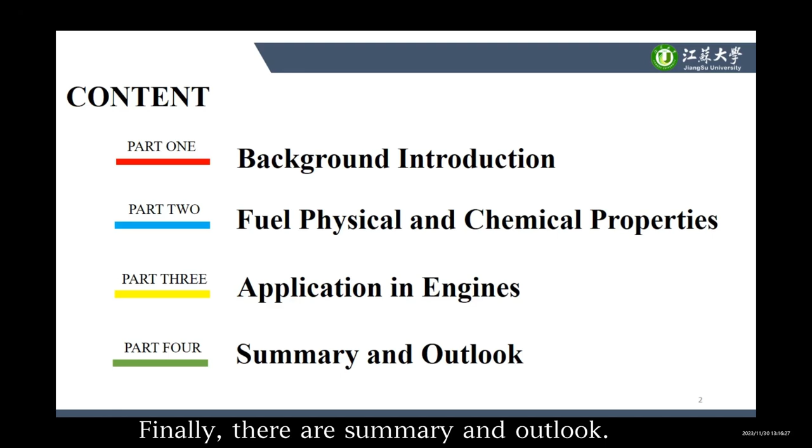First, let's go to the background introduction. Since China promised to reach carbon peaking in 2030 and carbon neutrality in 2060 at the 75th United Nations General Assembly in September 2020, and the Paris Agreement signed by major countries and regions in 2016 has controlled the rise of the global temperature and accelerated carbon neutrality policies and actions.

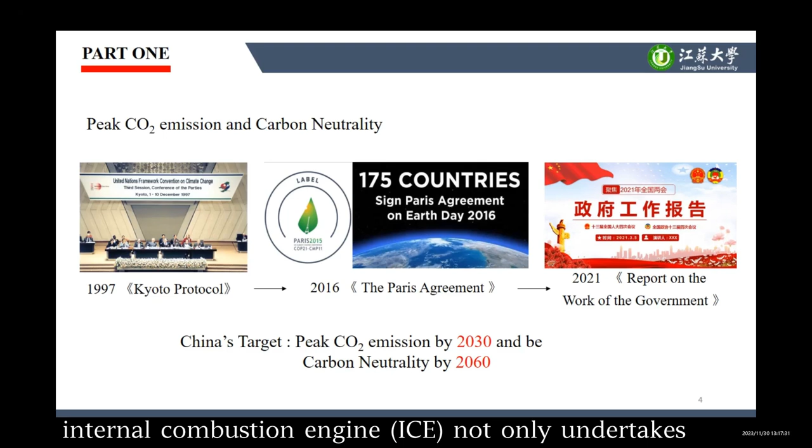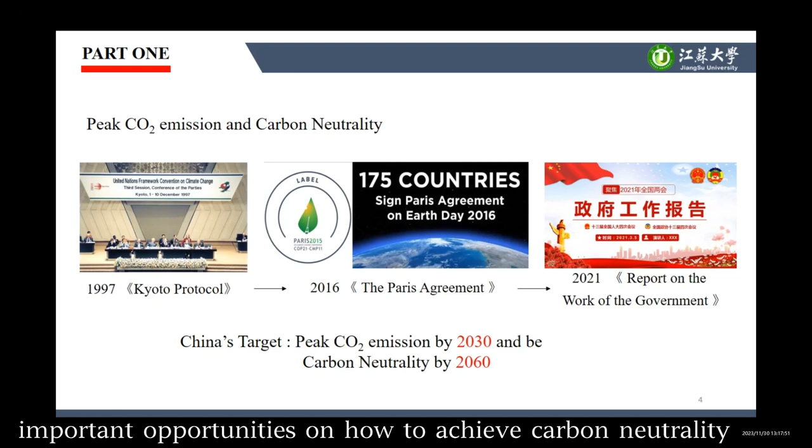As the leading power of a large number of road and non-road mobile machinery and national defense equipment, the internal combustion engine (ICE) not only undertakes the important mission of energy saving and emission reduction in the near and middle term, but also faces great changes and important opportunities on how to achieve carbon neutrality in the future.

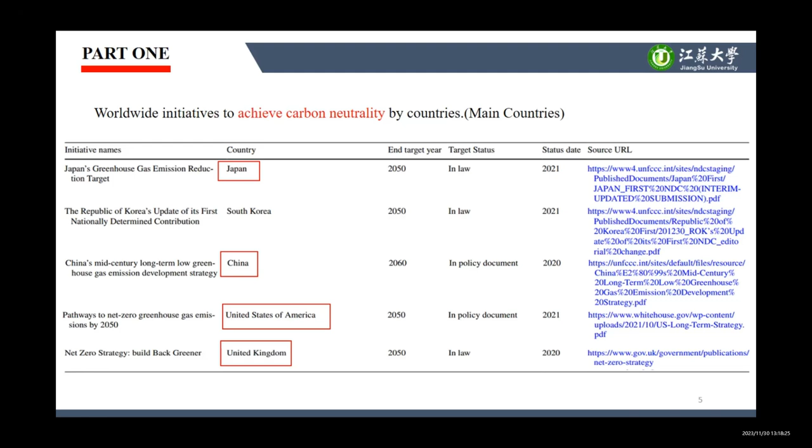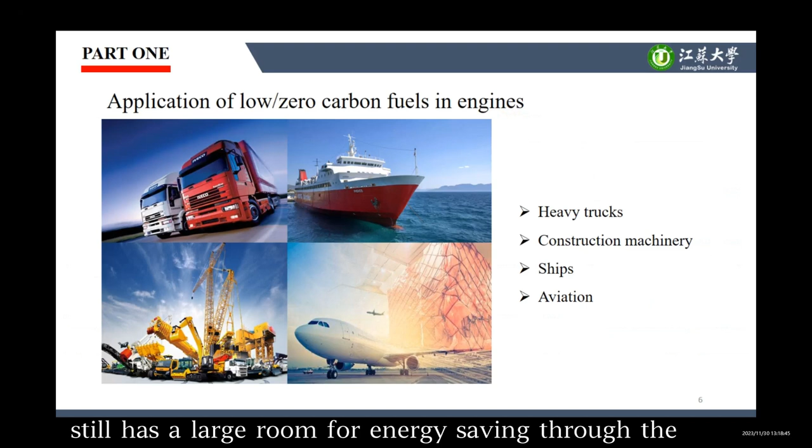This table shows worldwide initiatives to achieve carbon neutrality by many countries. At the 26th United Nations Conference of Parties on Climate Change, each country provided information on the target dates of achieving carbon neutrality and the end target year in the future. The internal combustion engine, an efficient and high power density thermal engine for converting chemical energy into mechanical energy, still has a large room for energy saving through the combination of electrified and intelligent technologies.

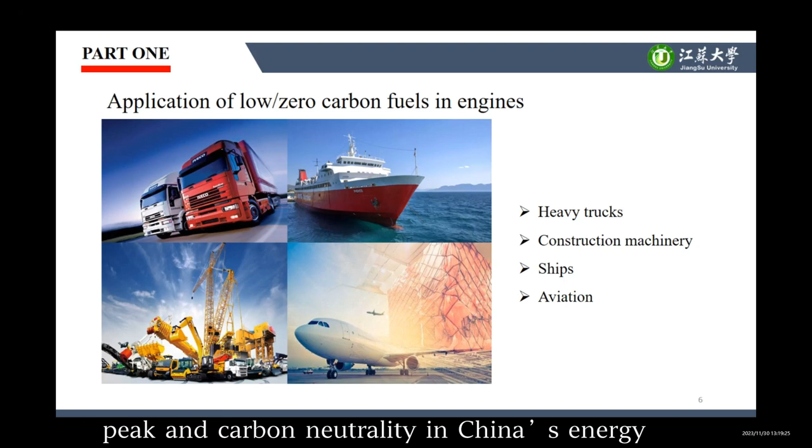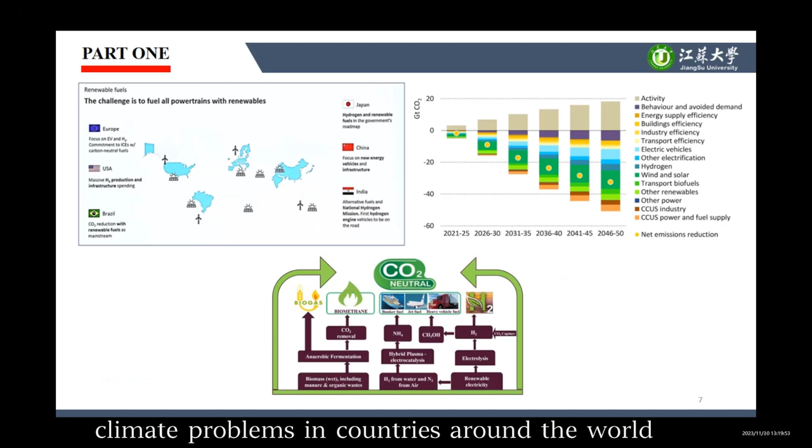By utilizing low carbon and zero carbon fuels, ICE can still be widely used in larger scale power equipment such as heavy trucks, construction machinery, ships, and aviation, so as to promote the early realization of carbon peaking and carbon neutrality in China's energy and transportation field. As shown in the upper left figure, the use of carbon-neutral fuels and other renewable fuels has become a long-term strategy for solving climate problems in countries around the world, including Europe, Japan, and the United States. The use of clean alternative fuels such as ammonia and hydrogen has become a research hotspot.

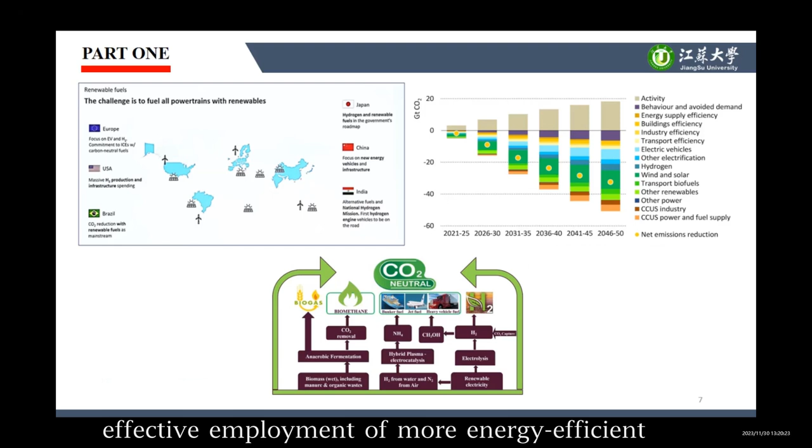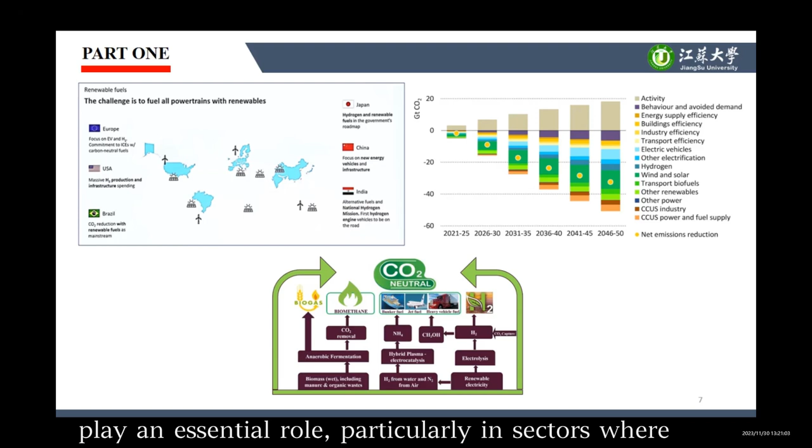As shown in the upper right figure, effective employment of more energy-efficient advanced technology, electricity generation, and rapid growth of renewables all play important roles in emission reduction. Emerging technologies and fuels, particularly bioenergy, hydrogen-based fuels, and CCUS, which means carbon dioxide capture, utilization, and storage, will play an essential role, particularly in the sectors where emissions are difficult to reduce.

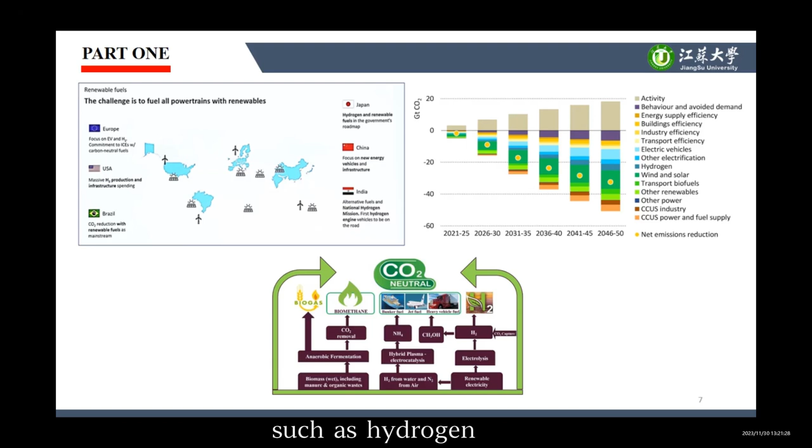This course aims to achieve energy conservation and emission reduction, and explore the application of various low-carbon, zero-carbon renewable fuels, such as hydrogen, ammonia, methanol, and natural gas in engines.

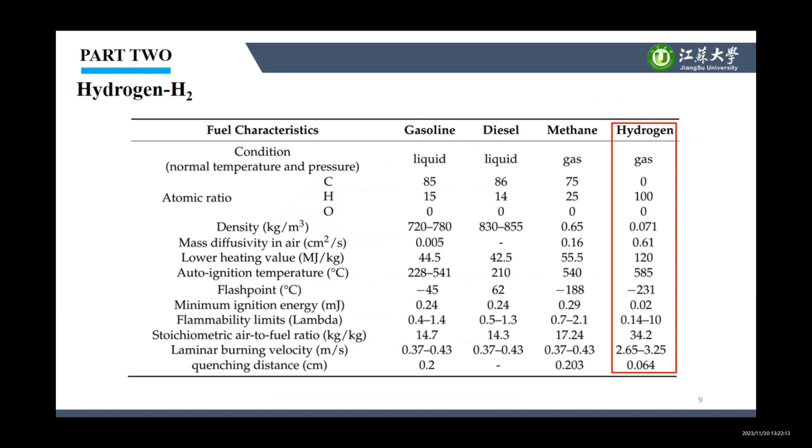Part 2 is fuel physical and chemical properties. Hydrogen can be produced from several varieties of renewable energy sources and efficiently obtained through large-scale electrolysis. And after its reaction with oxygen, water is produced. Additionally, hydrogen combustion or electrochemical reaction can be used to generate thermal or electrical energy as a power source for vehicles.

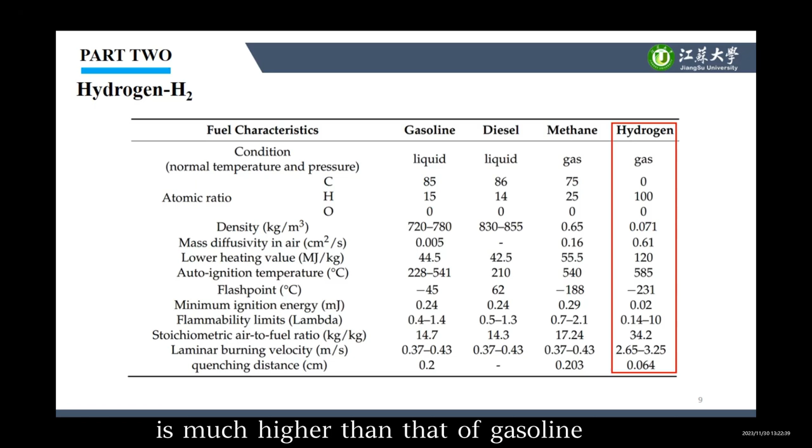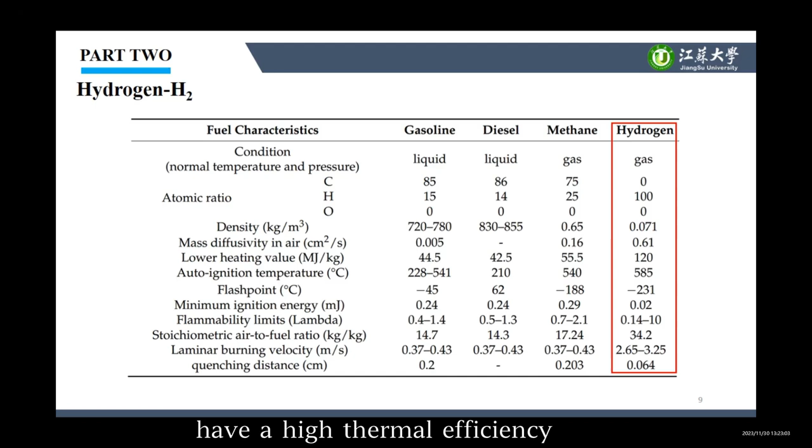The lower heating value of hydrogen is much higher than that of gasoline and natural gas. Combining fast laminar flame speeds, lean burn characteristics, and the high spontaneous combustion temperature makes the hydrogen internal combustion engine have a high thermal efficiency and potential knock resistance. This ensures the hydrogen engine has a higher indicated thermal efficiency than gasoline engines.

This table compares ammonia physical-chemical properties with some of the common additives used for assisting its combustion, that is, alternative fuels of non-fossil origin. It is reported that significantly higher ignition energy was needed to ignite ammonia when compared with fossil fuels, due to the low ammonia flammability. The minimum ignition energy was reduced when ammonia was dissociated into hydrogen to promote the ammonia and air reaction.

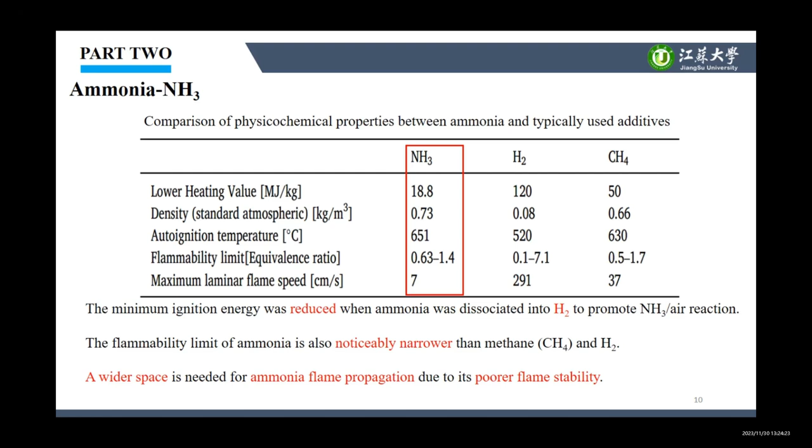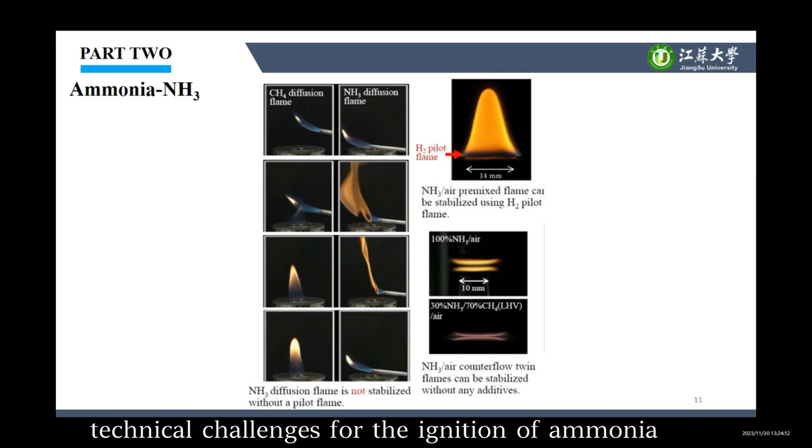The combustion rate of ammonia is very slow, and ammonia is difficult to ignite. In addition, the gasification of liquid ammonia requires the absorption of the surrounding heat. These are technical challenges for the ignition of ammonia and the stability of the flame. You can see from this picture.

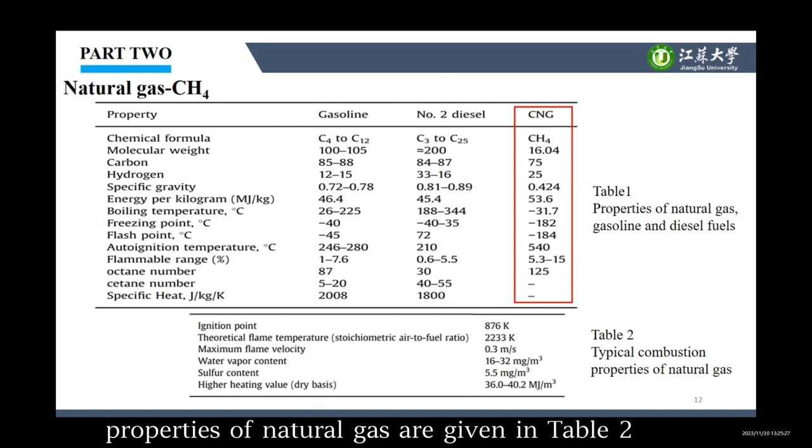Table 1 lists the properties of natural gas, gasoline, and diesel fuels. Typical combustion properties of natural gas are given in Table 2. Natural gas is an alternative fuel that utilizes CNG or LNG as an environmentally friendly fuel instead of fossil fuels.

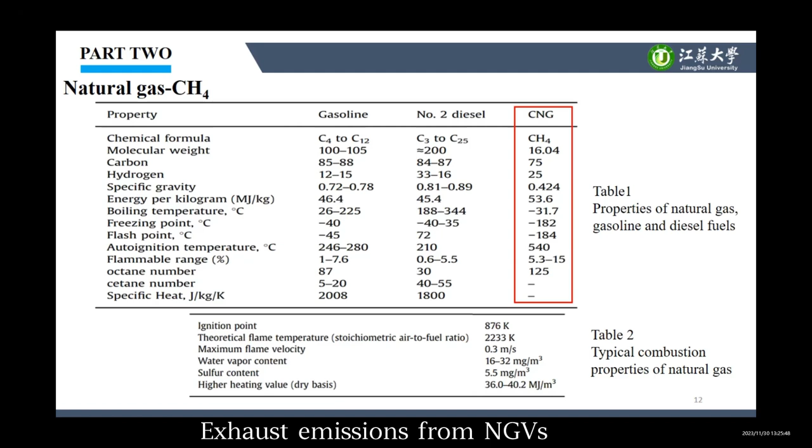Exhaust emissions from NG vehicles are much lower compared with equivalent gasoline-powered vehicles. In addition, less carbon dioxide is produced by combustion of natural gas than by combustion of both diesel fuel and gasoline, which makes natural gas engines favorable in terms of the greenhouse effect.

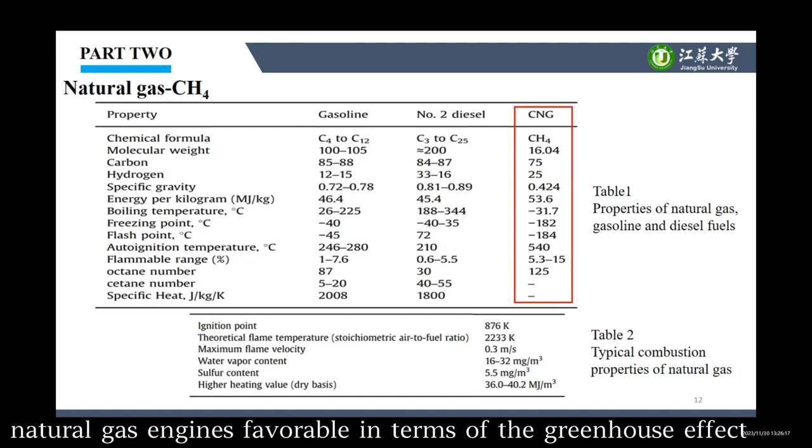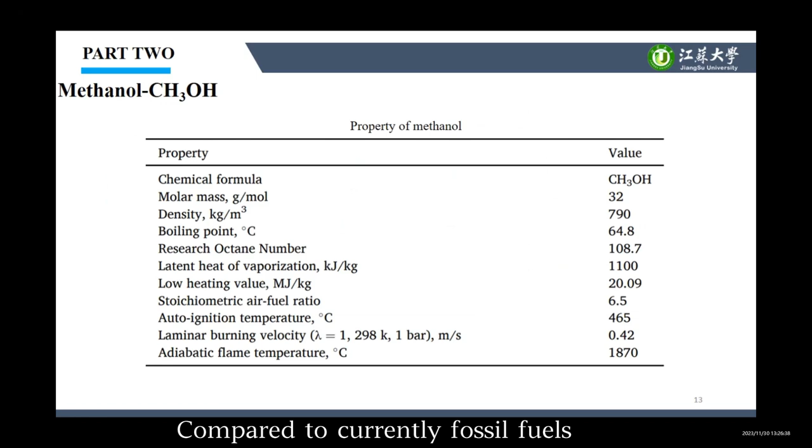Methanol is a potential clean fuel with advantages of low pollution emissions. Compared to current fossil fuels, methanol has special properties such as the high octane number, heat of vaporization, and laminar flame speed. These characteristics make it even more attractive for using in spark ignition engines.

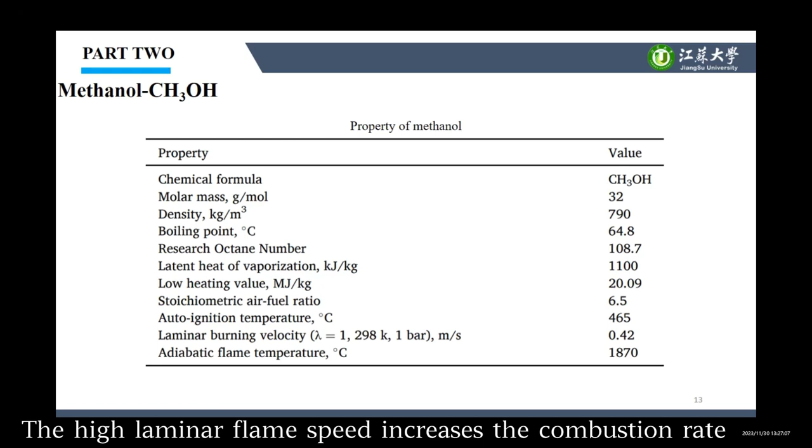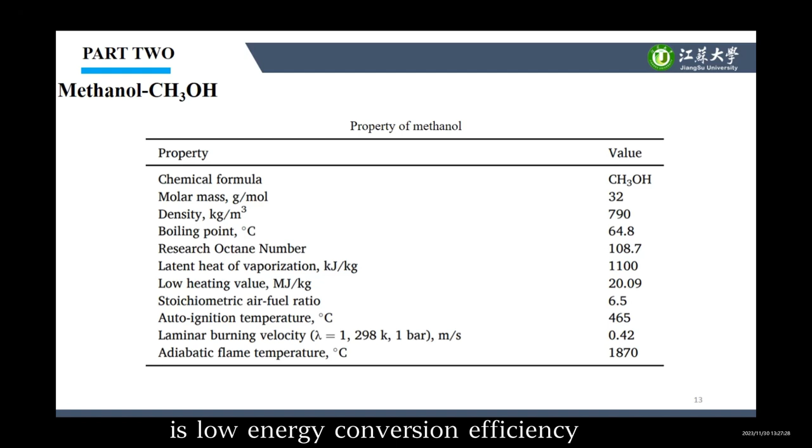The high laminar flame speed increases the combustion rate and contributes to improve the ignition stability and thermal efficiency. However, the disadvantage of the spark ignition engines is low energy conversion efficiency, especially for heavy-duty engines with large cylinder bores.

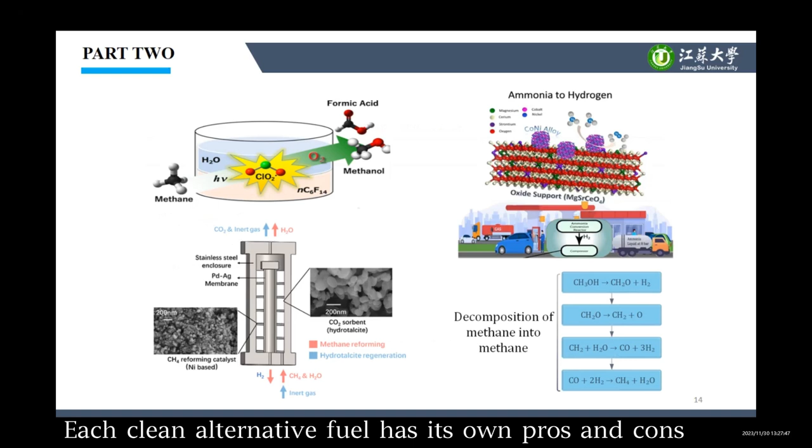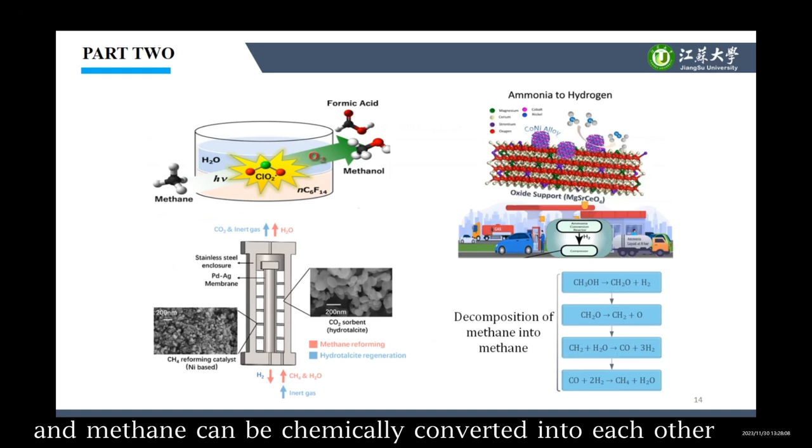Yes, each clean alternative fuel has its own pros and cons. Ammonia can be decomposed to produce hydrogen. Hydrogen can be produced from natural gas by reforming it. Methanol and methane can be chemically converted into each other, and the deficiency of the ammonia in the combustion process can be made up by hydrogen, natural gas, methanol, and other active fuels.

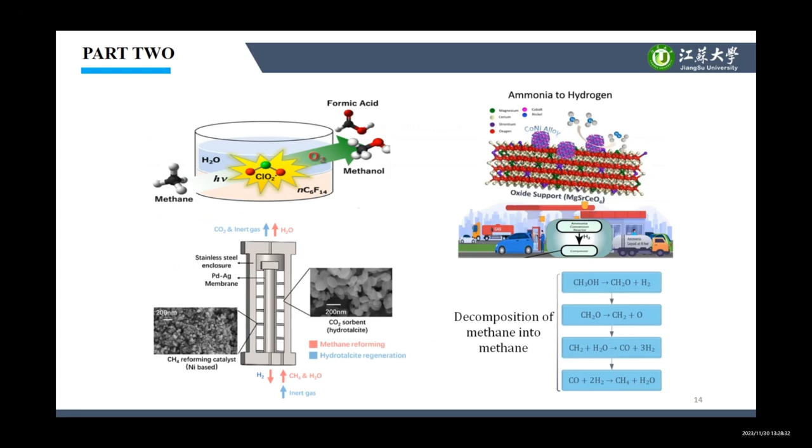Okay, next, let us explore the application of the clean fuels in engines. In this part, I will choose 4 renewable low-zero carbon fuels: hydrogen, ammonia, natural gas, and methanol respectively. There are also other new fuels or methods to reduce carbon emissions. Firstly, let's go to hydrogen engine.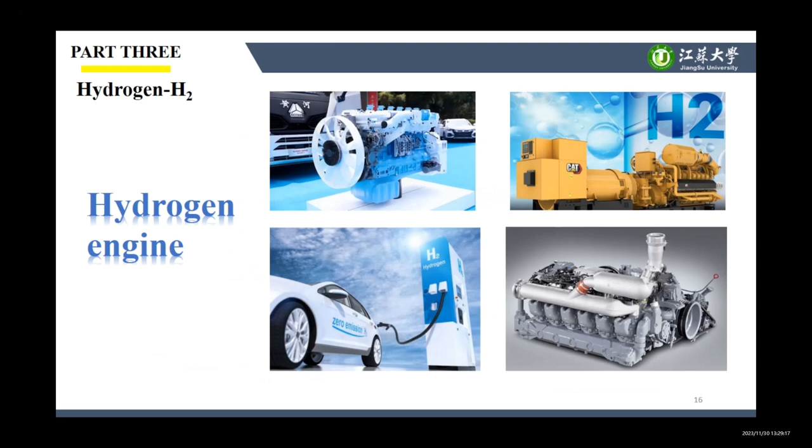At present, the use of hydrogen energy in the vehicle industry mainly includes fuel cell and internal combustion engine. Hydrogen fuel cells have a disadvantage in terms of their cost and service life. And the price of the fuel cell vehicle is still much higher than that of the traditional vehicle. Compared with the fuel cells, hydrogen internal combustion engine can take advantage of the mature industry chain and existing technology.

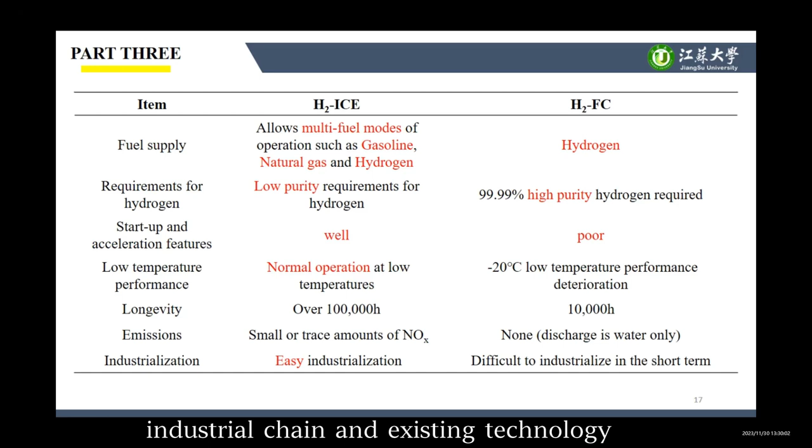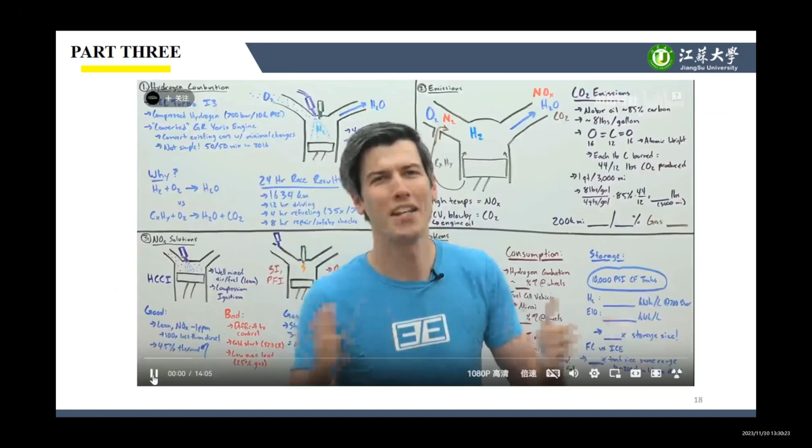Moreover, the purity of the hydrogen is not strictly required. So, hydrogen is an ideal alternative fuel for internal combustion engine. The video shows hydrogen engine.

And welcome. In this video, we're going to talk about the work Toyota is doing on developing hydrogen combustion engines. So the idea is, what if instead of making a whole bunch of new electric cars, we instead took the combustion cars that we already have and converted them to hydrogen-based fuels. And so instead of using a carbon-based fuel, which has carbon emissions, you would have a hydrogen-based fuel, which just has water as its emissions. So you would eliminate those carbon emissions. Now, that sounds like it would make a lot of automotive enthusiasts pretty happy.

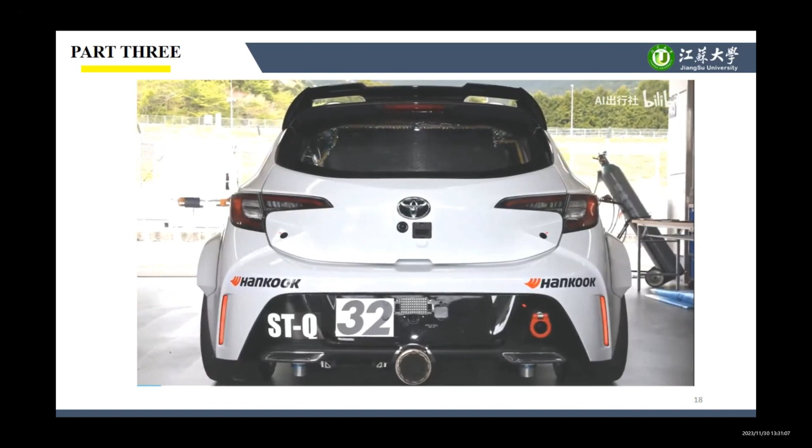So what Toyota did is they created a Corolla Sport that was powered by a hydrogen combustion engine, and they entered it into a 24-hour endurance race. And so this is powered by a 1.6-liter turbocharged inline 3-cylinder that comes from the GR Yaris, and then it's been converted over to hydrogen. Now, it's not nearly as simple as saying it's been converted over to run on hydrogen. It's quite a process. In fact, back in 2016, they were still using a 50-50 mix of gasoline and hydrogen because it's very difficult to get it to run on hydrogen alone. But here we are 5 years later, and they have a functional hydrogen combustion engine.

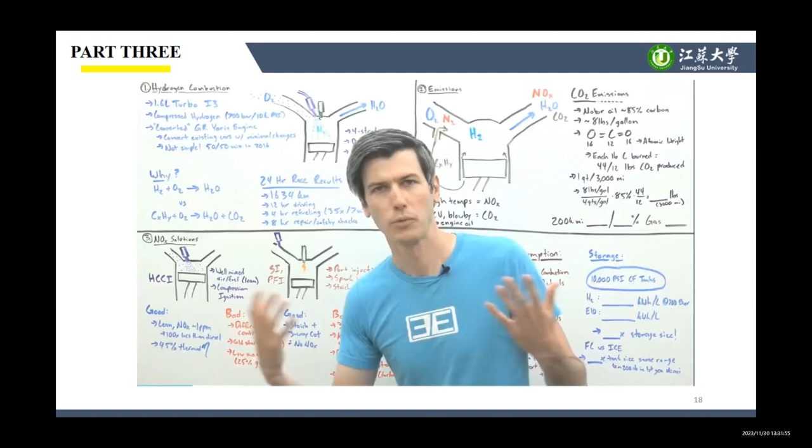So this engine operates much like a typical gasoline engine. It has 4 strokes: intake, compression, power, exhaust. It has direct injection for the hydrogen fuel, and it is spark ignited. So in comes oxygen, you spray in hydrogen, and then your emissions are water. So how did they do in that 24-hour race? Well, the results are less than ideal, but keep in mind, it's a proof of concept vehicle really that's going out there. So in the 24-hour race, they were able to travel 1,634 kilometers, about 1,000 miles in 24 hours. So not super far.

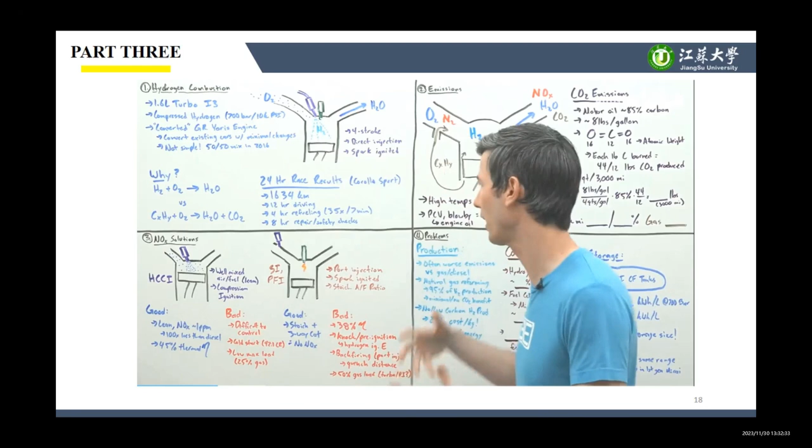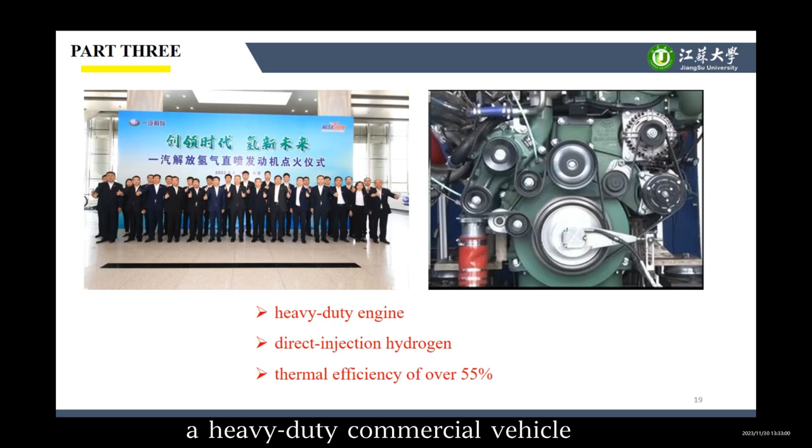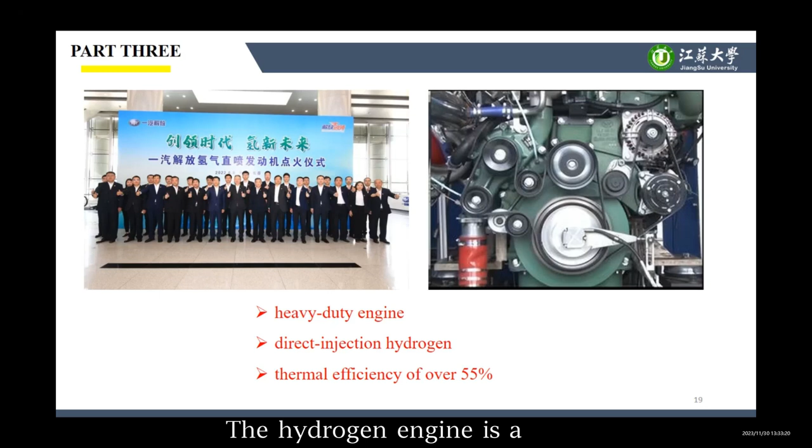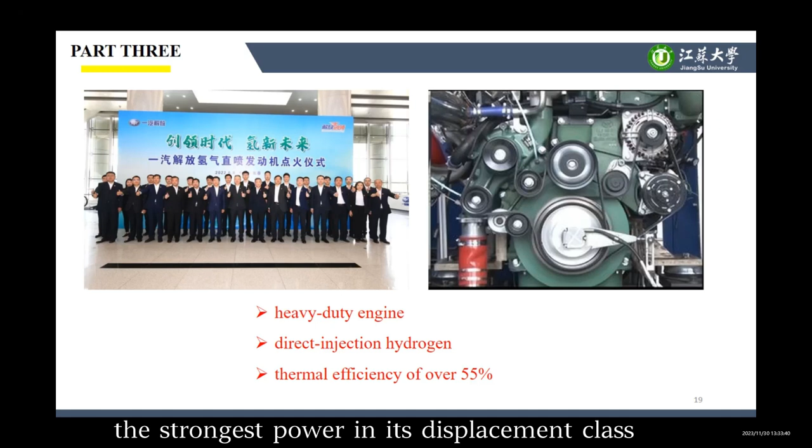On January 8, 2022, a heavy-duty commercial vehicle direct injection hydrogen engine, independently designed and developed by FAW Co. Ltd, was successfully ignited and ran stably. The hydrogen engine is a 13-liter heavy-duty engine with a running power of over 500 horsepower, the strongest power in its displacement class, and an indicated thermal efficiency of over 55%.

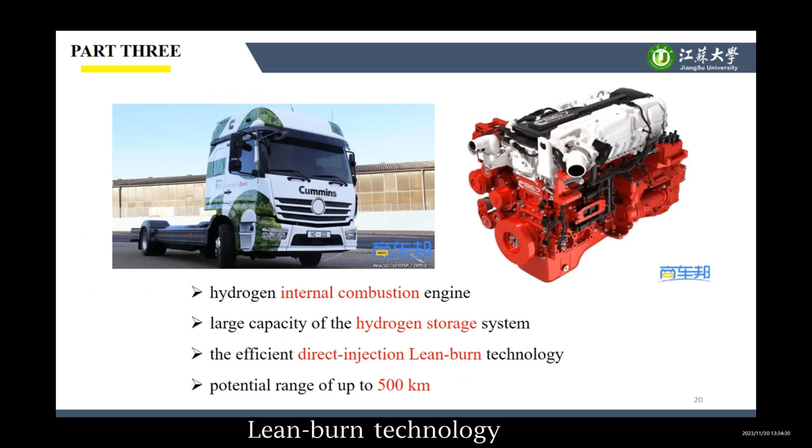This picture shows a Cummins hydrogen internal combustion engine. The hydrogen storage tanks are made of carbon fiber and are lightweight and very robust. The larger capacity of the hydrogen storage system, combined with the efficient direct injection technology, provides the truck with the Cummins engine with a potential range of up to about 500 kilometers.

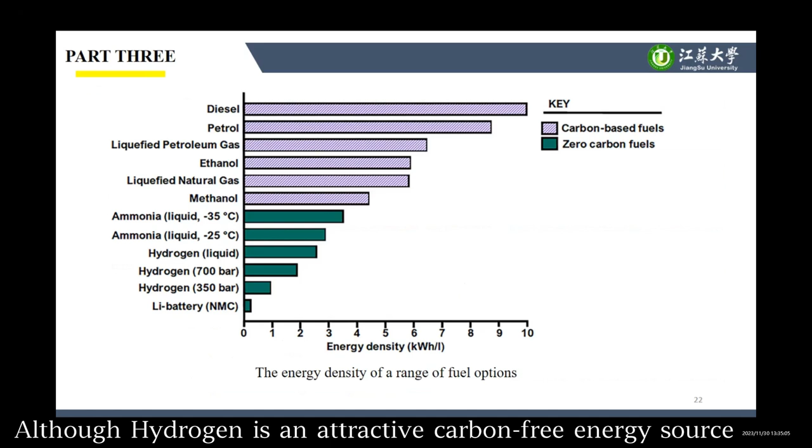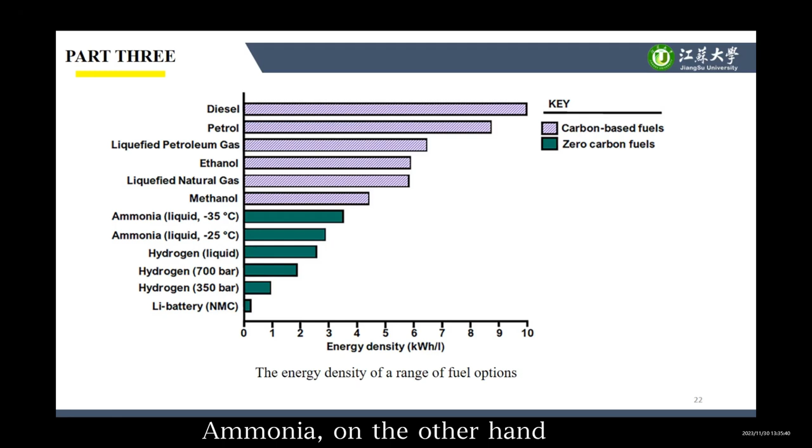And then I will talk about ammonia engines. Although hydrogen is an attractive carbon-free energy source, its storage is difficult and more expensive due to the high compression pressure of about 350 to 700 bar needed to attain competitive energy density. As shown, ammonia, on the other hand, exhibits higher energy density than hydrogen with a substantially lower pressure of about 10 bar.

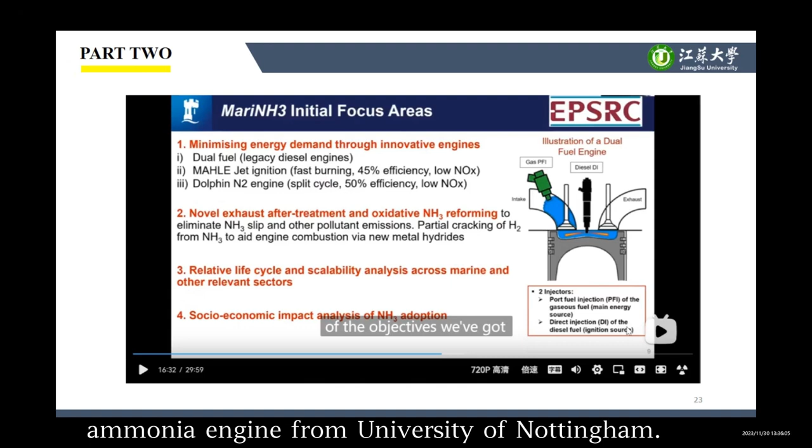This video shows ammonia engine research from the University of Nottingham. What I wanted to do for the last part of the presentation was actually show you some of the engine results that we've got. So whenever you have a new fuel, as an engineer, it's important to have a certain degree of skepticism over its operation and be realistic about it. And actually, we all had a healthy degree of skepticism around ammonia, but some of the results we've seen already are very encouraging in the engines that we've been running.

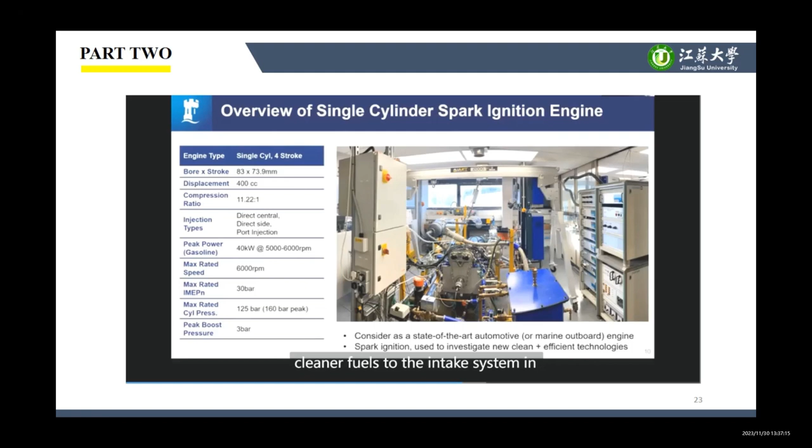So what you can see on the screen is a picture showing our thermodynamic single-cylinder engine. You can think of this as being a typical automotive spark ignition engine, typical of what you'd find in a modern passenger car fueled with gasoline, which is a very similar type of engine to a modern outboard engine on smaller boats and marine vessels. So state of the art, we've taken this engine and retrofitted cleaner fuels to the intake system, in effect.

So what we have looked at in our initial experiments is we always start the engine using E10. We run it up to a fully warm condition, and then we co-fuel the engine. So we start to introduce some ammonia and we back out the amount of E10 until hopefully we're running on 100% ammonia. Keep in mind it's a very bad fuel in terms of being a very slow burning fuel. So our initial experiments focused on just one engine speed and load, and that's shown in the title.

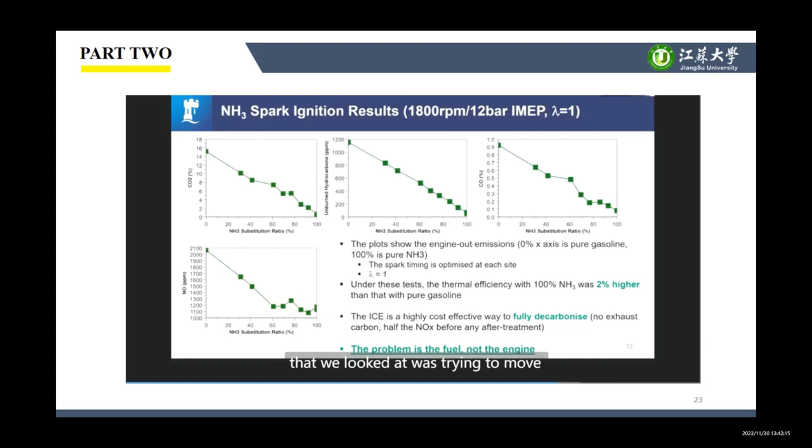It's a positive start. So next, let's talk about another fuel, natural gas. The availability of the domestic natural gas reserves, the filling infrastructure and state incentives help promote the increasing integration of the natural gas vehicle in transportation.

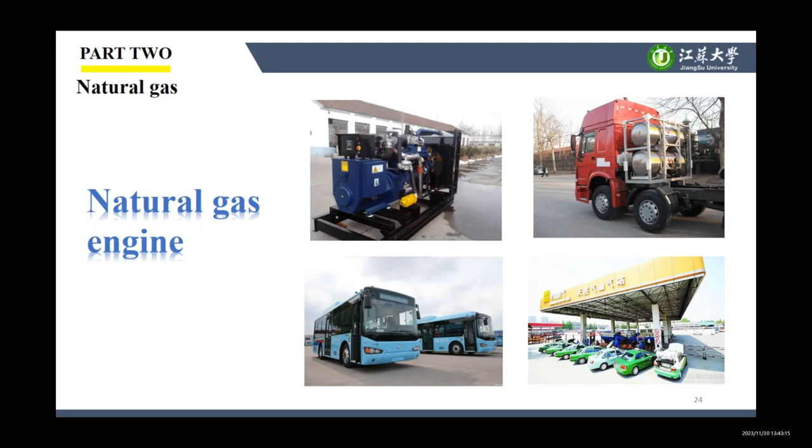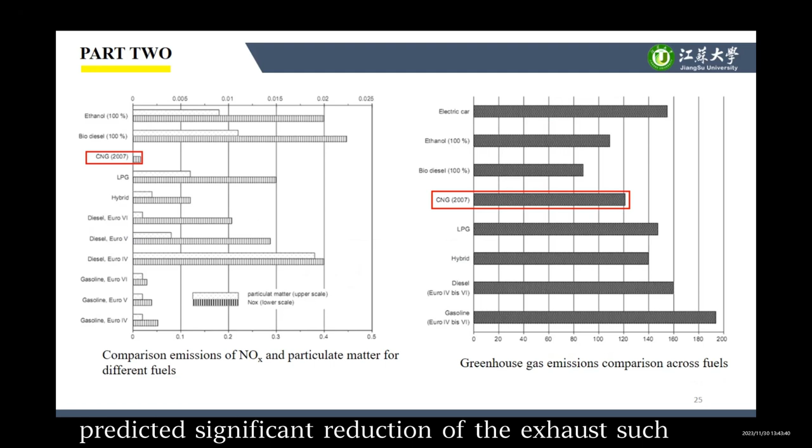Natural gas vehicles have increased in many captive heavy-duty fleet applications, such as refuse trucks, transit buses, school buses, and utility trucks. From this figure, we can know replacing a typical older in-use vehicle with a new natural gas vehicle predicted a significant reduction of the exhaust, such as carbon monoxide, by about 70 to 80%.

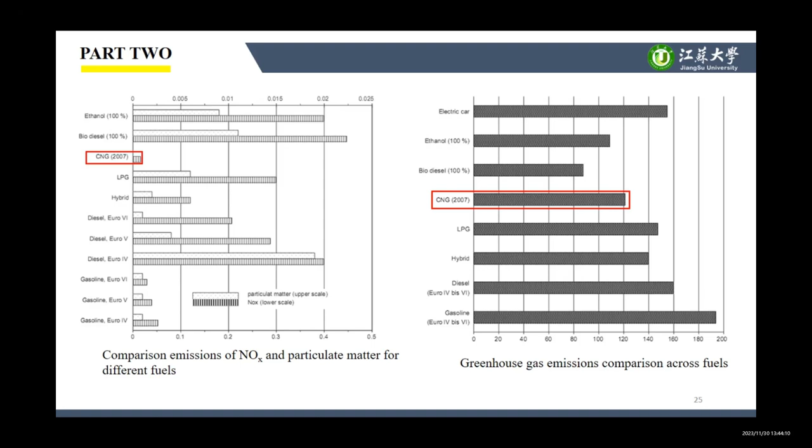Non-methane organic gas, NMOG, by about 50 to 75%, NOx by about 75 to 95%, and carbon dioxide by about 20 to 30%. This video shows us how dual-fuel engines work from MAN Truck & Bus.

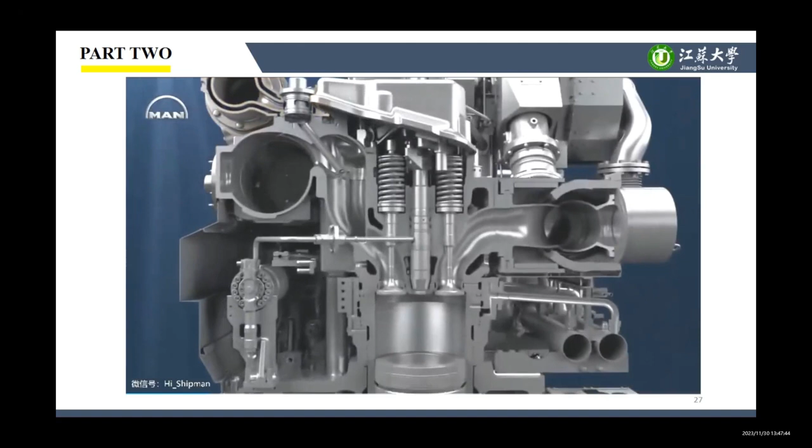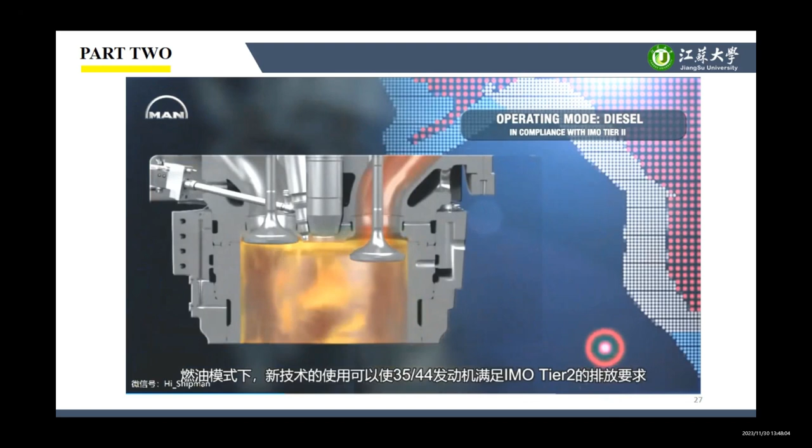Yes, this video shows how dual fuel engine works from MAN Truck & Bus. The MAN 35/44DF. Its dual fuel technology with two separate injection systems makes it run on any fuel available, no matter if it's liquid fuel such as heavy fuel oil, marine diesel oil, marine gas oil, or gas fuel like LNG. The 35/44DF is based on MAN's well-proven 32/44CR engine. Both engines feature a state-of-the-art common rail system with injection pressures of up to 1,600 bar. In diesel mode, this system and other technologies enable the 35/44DF to fulfill the current emission regulation IMO Tier 2.

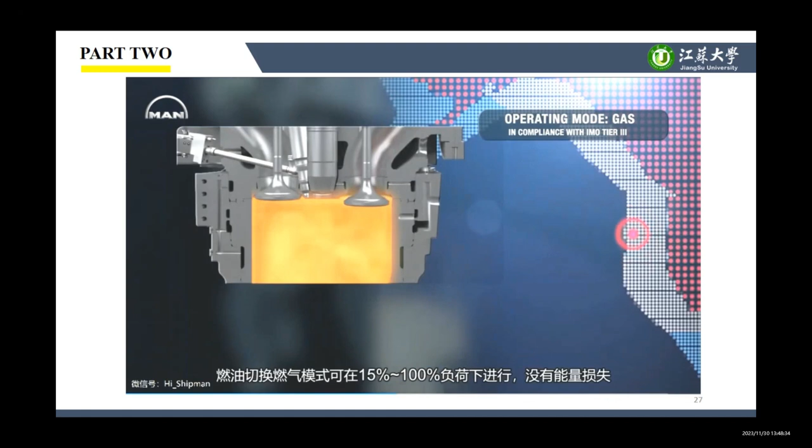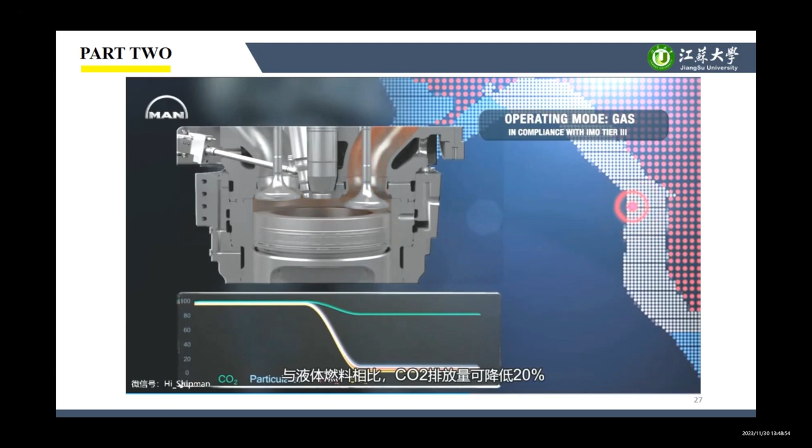To meet the even stricter emission limits of future regulation IMO Tier 3, the 35/44DF can also operate in gas mode. Switching to gas can be done on the fly at loads between 15 and 100% with no loss in engine power. To ignite the air-gas mixture, a small amount of liquid fuel is injected by a separate pilot fuel system. In gas mode, the MAN 35/44DF fully complies with IMO Tier 3, lowering CO2 emissions by 20% and other emission levels by up to 99% and beyond, compared to liquid fuel operation.

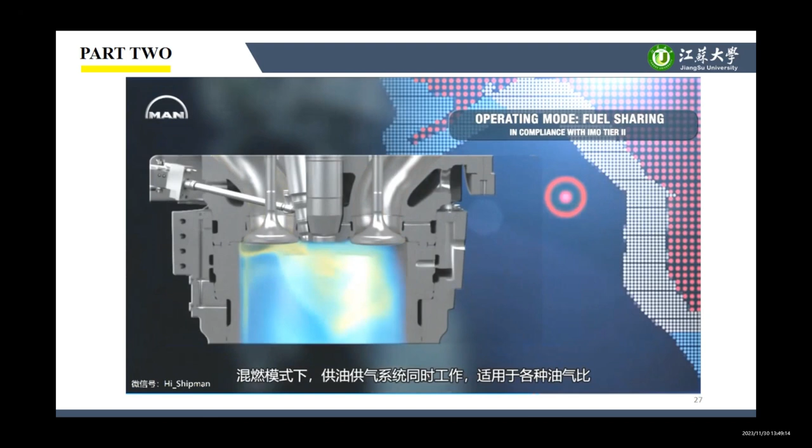The 35/44DF features a fuel sharing mode. In this mode, both gas and diesel supply systems are active, which lets the engine run on multiple ratios of gas and liquid fuels. This makes the 35/44DF virtually immune to variations in gas fuel quality, allowing it to operate even on gas that would be unusable for a conventional gas engine.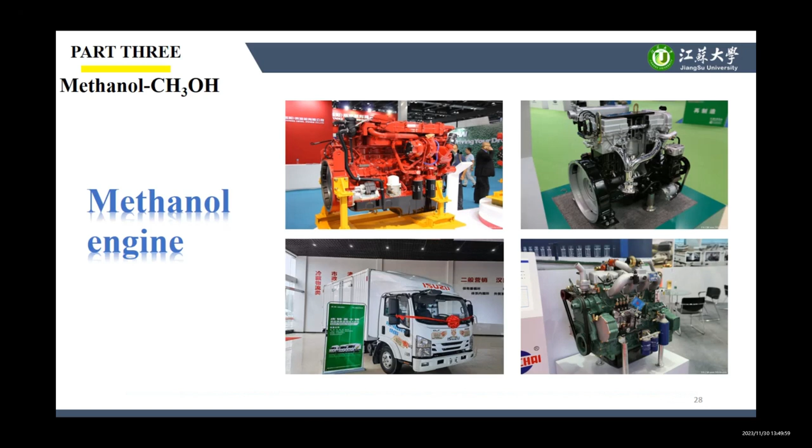Okay. The last fuel is methanol. Methanol is a recognized renewable clean energy. In the context of carbon neutrality, it is of great significance to achieve zero-carbon production of methanol fuel and its application in internal combustion engines to reduce emissions.

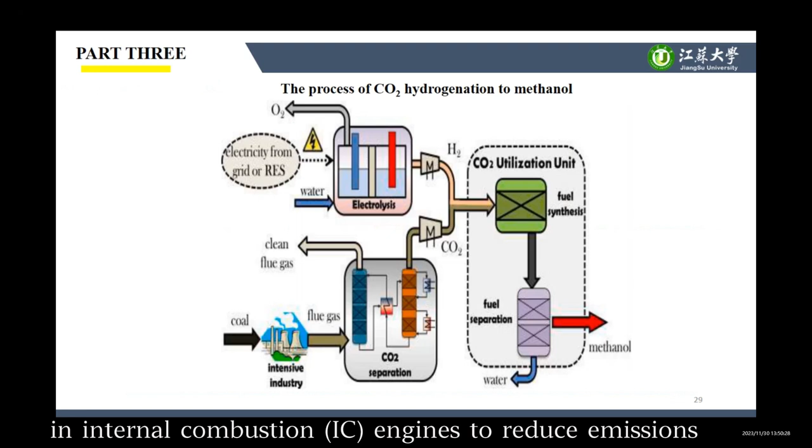There are abundant sources of raw materials for the production of methanol, and the ecological characteristics of methanol from all things and all things from methanol in nature. As a fuel, methanol has high economy, safety, environmental protection, reliability, and applicability, and is an ideal renewable fuel for traditional internal combustion engines.

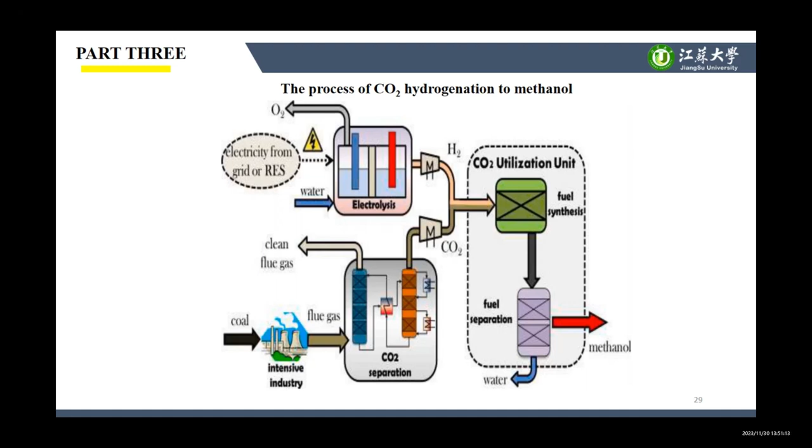The engine using green methanol fuel can be carbon neutral, as shown in the figure. CO2 is captured by various methods. Hydrogen is produced from renewable energy, and green methanol is synthesized from the captured CO2 and hydrogen produced from renewable energy. Methanol is combusted in the engine and passed through the exhaust aftertreatment device to generate CO2.

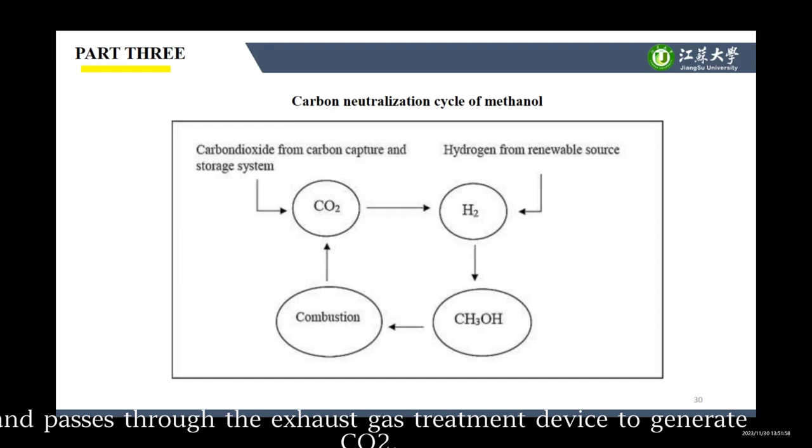And CO2 is captured and hydrogen is used to form the methanol. Therefore, the combustion of methanol in the internal combustion engine can achieve a carbon-neutral cycle without increasing the CO2 emissions.

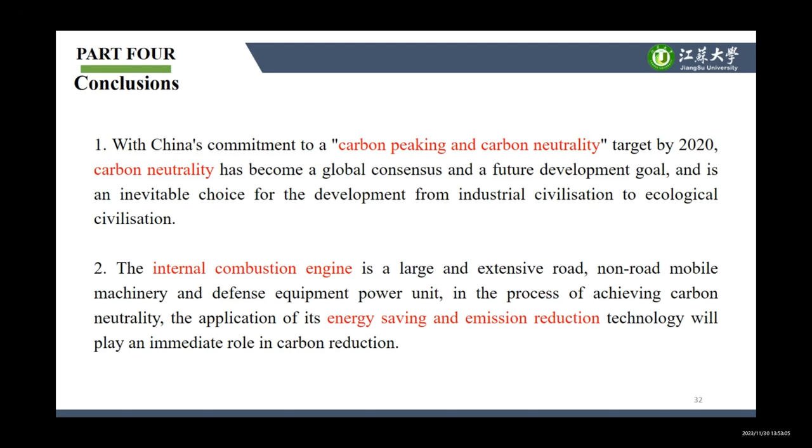Yes. Today we talked about low carbon and zero carbon fuel engines.